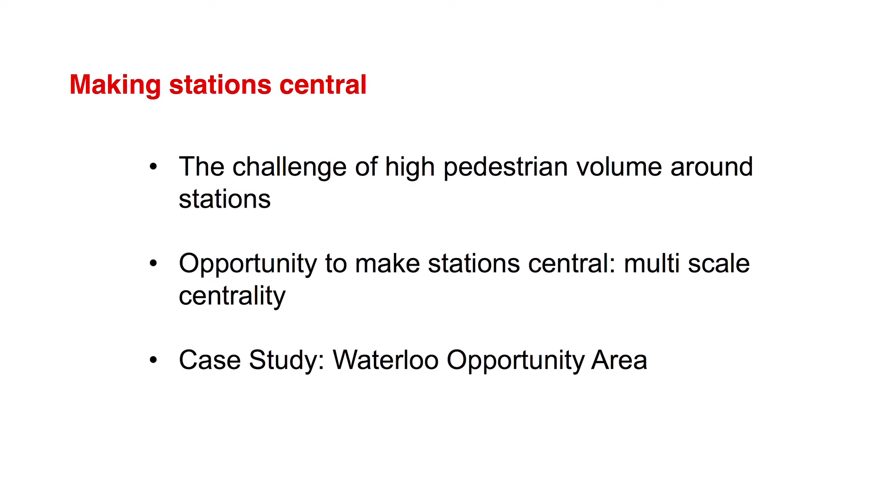And then I'm going to show one case study, which is Waterloo Opportunity Area. It's Elizabeth House, as Camilla was explaining. But again, in that project, as well as looking at the development side, we actually had to go wider to understand what the context was.

You're familiar with London, but what we then do is understand that the city is made of the places that connect to each other. And once you have that understanding, you begin to look at the emerging network. And what you'll see in a lot of the diagrams is this color coding through red for the high movement potential, through the blue spectrum of low movement potential. And this is only looking at the network, at the street connectivity. It has no movement itself embedded into the model, but it actually helps understand and predict movement. So it's a very useful diagnostic tool.

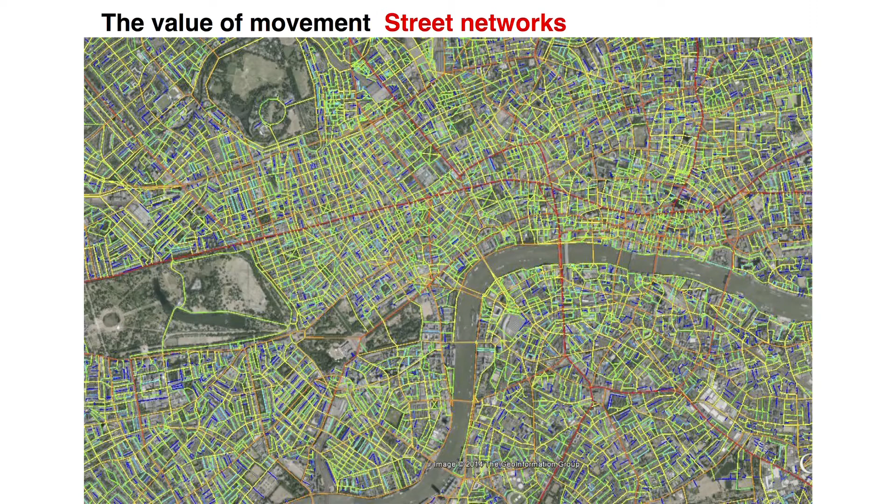What you then do is layer on stations. And as we've heard from Paul just before, the challenge of the stations is, yes, they bring movement, but they bring infrastructure to it. So what we call this thing of stations is negative attractors. You have a lot of movement, but then you have a lot of barriers around the infrastructure that you require for the station. Particularly when you're talking about railway infrastructure, it impedes movement, although you have arches, but simply in terms of the landmass and the boundary required by the station, you're already taking a lot of that movement.

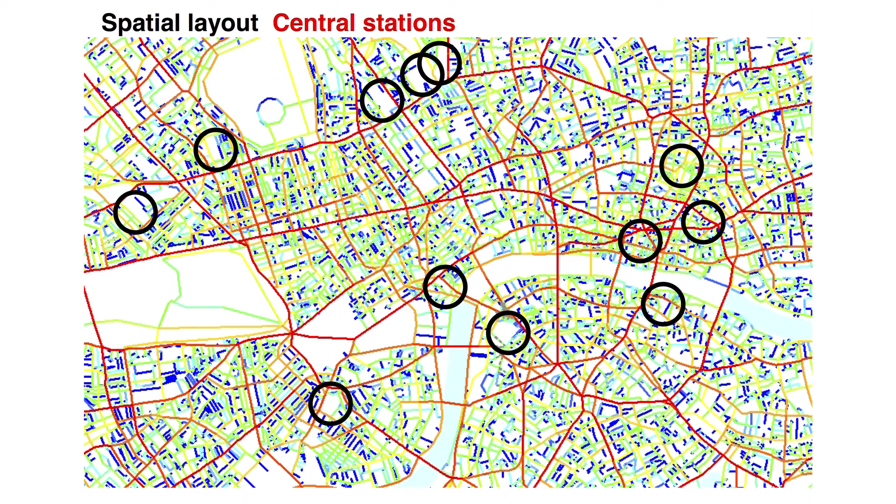The other thing to look at is, unsurprisingly, stations are already quite central. So they're within the key network of spaces in the city. So even though they're not in the center, although the underground then follows that, they're on the main spines leading into London. And again, the same image, taking the background out. And you'll see most of the northern stations along the Marylebone and Euston Road, Victoria Station, Waterloo, which will come in a moment, and then some other stations that come into central locations, Liverpool Street, which I'll talk a little bit more about in a moment.

This is another diagram which looks at the permeability pattern. Again, red are small walkable environments. Blue are big blocks that take you longer to walk around. And what you'll begin seeing is obviously the problem that, while on the one hand you're next to an integrated accessible road, you're creating local segregation. Euston, King's Cross to a varied degree, Marylebone, Paddington, and so on, Waterloo Station. Fenchurch Street is an interesting one because it's well embedded, so there's something to say about almost invisible transport infrastructure.

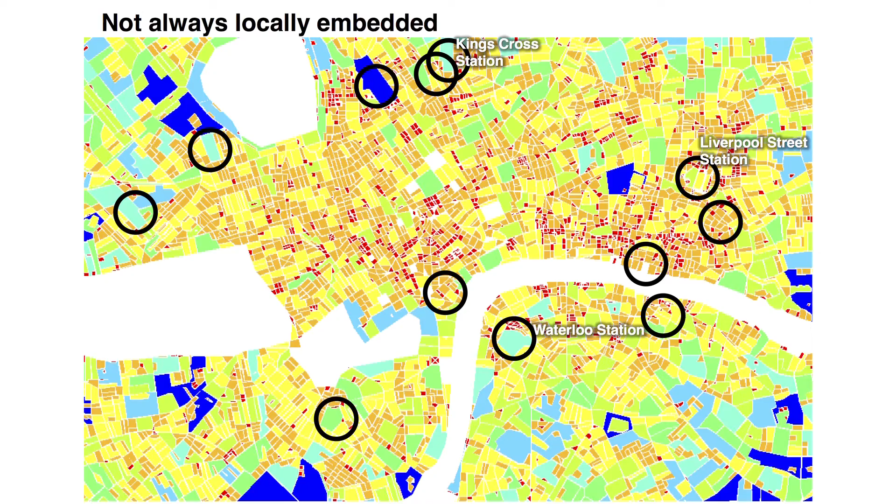And Liverpool Street Station, where the embeddedness allows it to be part of the city. And about 30% of movement that goes through the station is actually through movement. It's not transport-oriented movement. So that's the kind of principle that we're trying to look at when we're integrating transport infrastructure to city infrastructure. It's the grid that allows the potential of that movement to become an opportunity.

Numbers. And this is today, 2012, 100 million passengers coming out of Waterloo Station, and it trails off. And what I've done in this chart is combine the London graph with the top national railway infrastructure. New Street in Birmingham, Glasgow, Leeds, ranking 8 on their own, become 19 when you take the local underground stations. So underground movement in London is higher than New Street to a degree.

So, the first London underground station, Oxford Circus, what else? What is the other underground station? Piccadilly. So, the size of the problem in terms of movement is there, and the opportunities to integrate this, although you could say that they're already integrated. So there's this mismatch, and we then have to look at the local opportunities of the design, as Sandy was telling a moment ago.

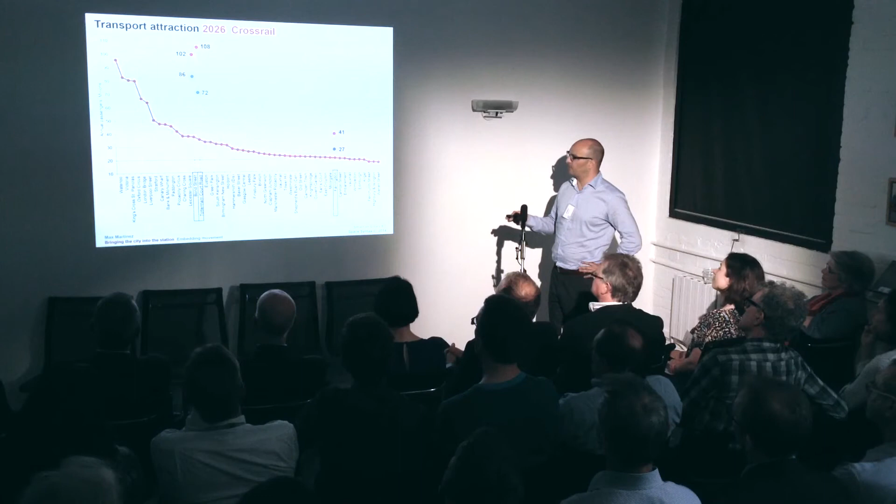The numbers get even higher when you bring in Crossrail. The numbers in blue for 3 stations from Bond Street are 86 million once you bring in Crossrail, 102 million if you then take the revised version that has been circulated by Arup Transport. So again, at the moment we're struggling with the public realm of Waterloo. We then have to handle the same amount of movement through a number of Crossrail stations within central London. How do we do that?

So I'll show Waterloo Station and Elizabeth House. Elizabeth House is this building and site in here, but we're now looking at the whole of the station in terms of the strategic opportunities.

And the process that we go through in the office is first creating a diagnostic, understanding what's there in terms of movement. And I'll go back simply to show the area, as other areas of London, has dramatically changed. The South Bank completely transformed over the last 15 years. Cultural institutions, not least the Tate, and the whole embankment has now come into its own.

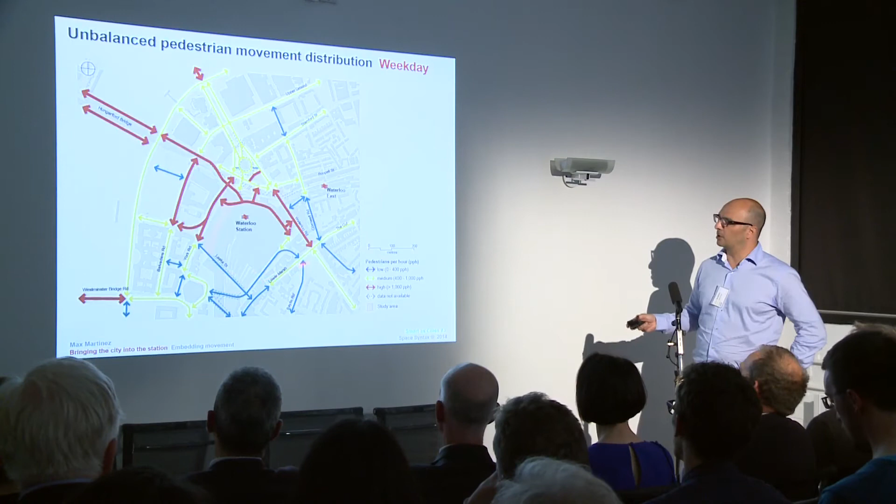And yet, what you have in terms of movement is, again, 100 million passengers per year that immediately disappear from the area. So you have an unbalanced pedestrian distribution during the weekday, although you do have a little bit of movement on the network of commuters leaving Waterloo Station, walking to the city, so quite a lot of distance to go there. But the rest of it struggling. Lower Marsh, as we all are familiar with, again, struggling because it doesn't have the movement potential.

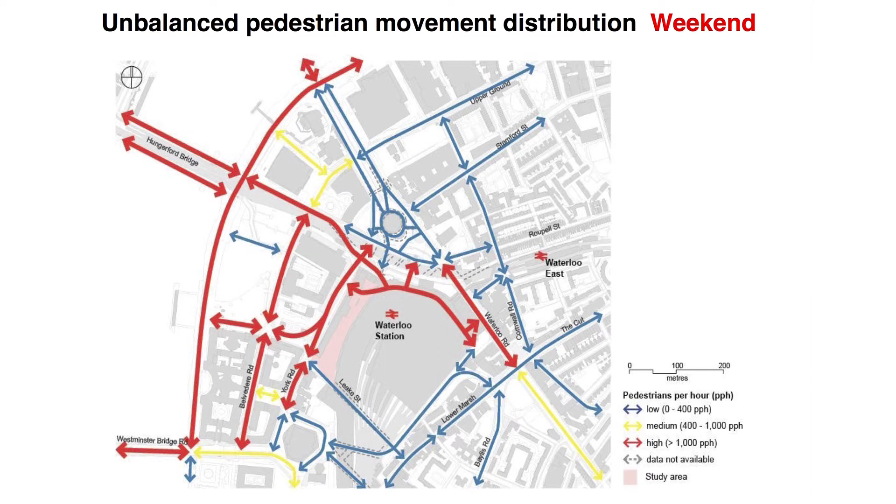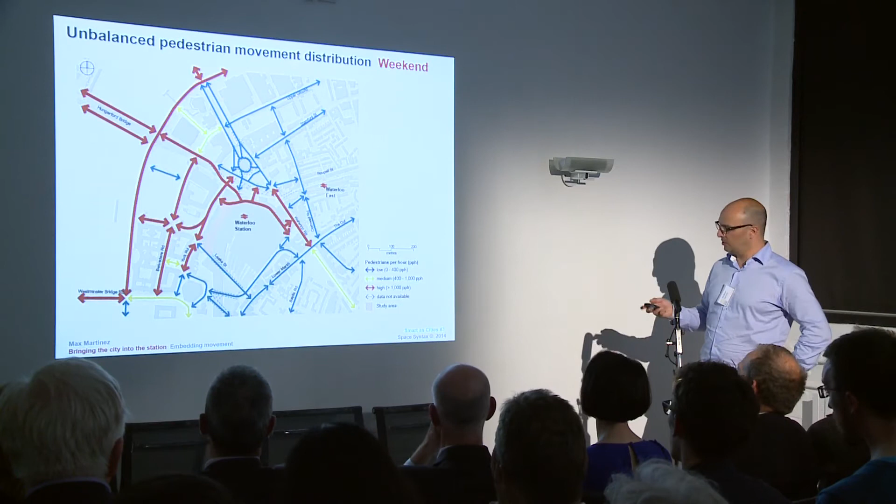The picture is made worse during the weekend, where the Queen's Walk becomes an attractor in its own right, drawing a lot of movement from the station and from the North Bank, and the rest of the network doesn't deliver any movement, and it's not beneficial for anyone. Again, back to Lower Marsh. So that's one thing. The next one is to explain, so why is this happening? And here we go back to the analysis, again, of the network.

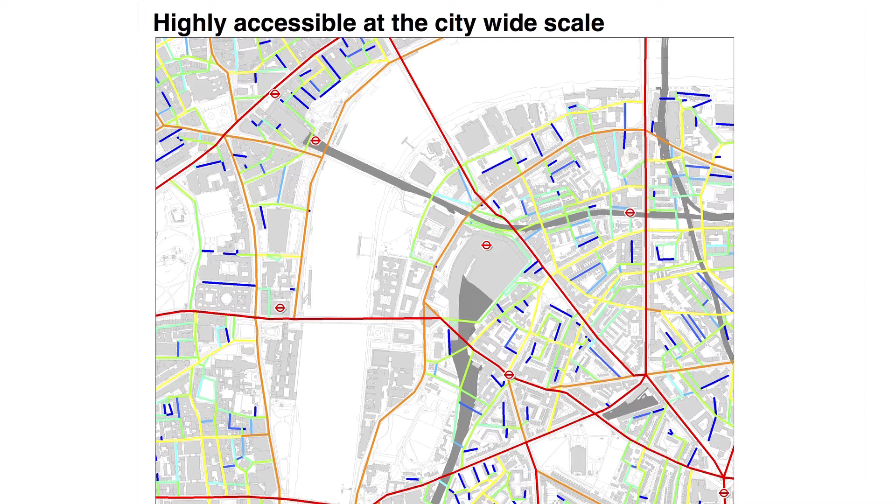It's a strategic location in terms of the city, very easily accessible if you're moving long distances. You have the connectivity. This is vehicular connectivity. You have the connectivity of Waterloo Bridge, Blackfriars, and so on, making it absolutely central. But what you also see is the lack of embeddedness, so that the centrality at a local level is almost non-existent.

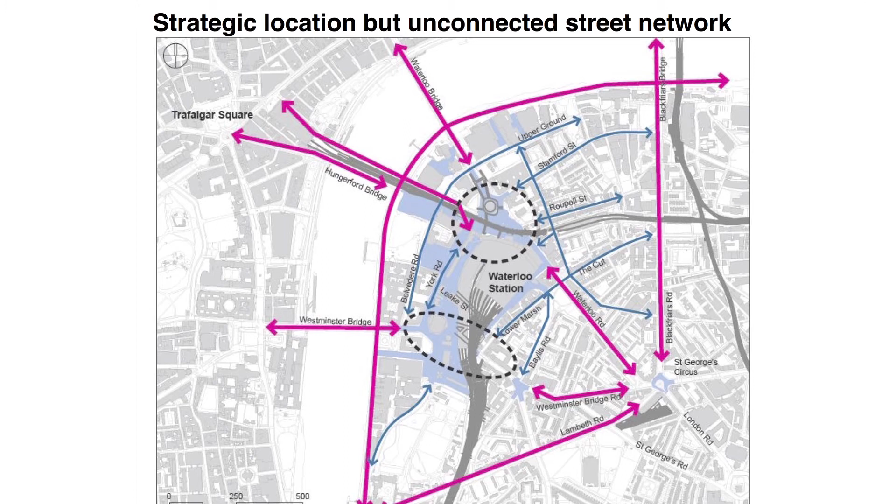A quick diagnostic saying, well, you have the lines moving in, but they somehow fail to compose themselves into the center. You could argue that it's a consequence of planning and the idea of a vehicular-dominated urban plan, as the roundabouts that were supposed to take us around London in the Abercrombie plans. And again, that is on top of the blockage of the station.

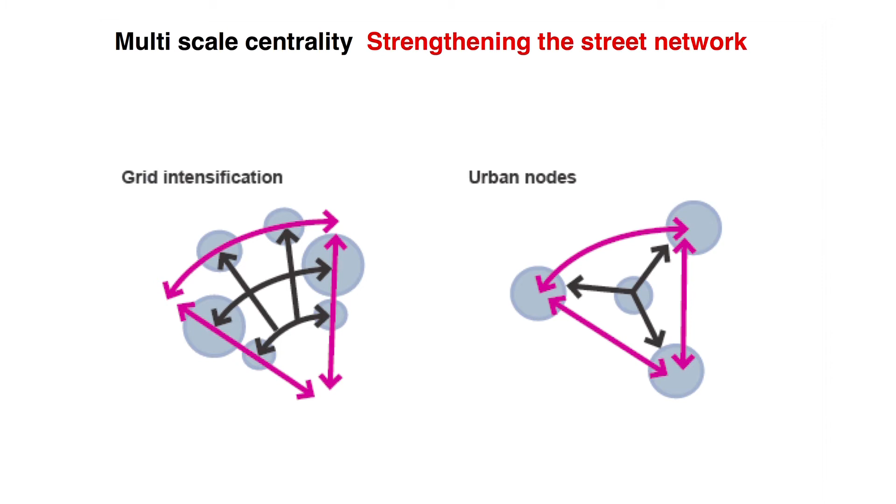A relatively simple strategy, which was simply about intensifying the grid and intensifying the connection of the large-scale centrality with the local centers, the local connections, improving almost the doorstep of the station. And that in itself will allow the emergence of new urban nodes.

The important thing to say here about multi-scale centrality is that it's not a hierarchical thing. It's not that you have a center that behaves at the citywide level and another one that behaves at the local level. There's different segments that behave differently at different scales, if you're walking in a neighborhood center, a residential center, or if you're talking about London as a whole.

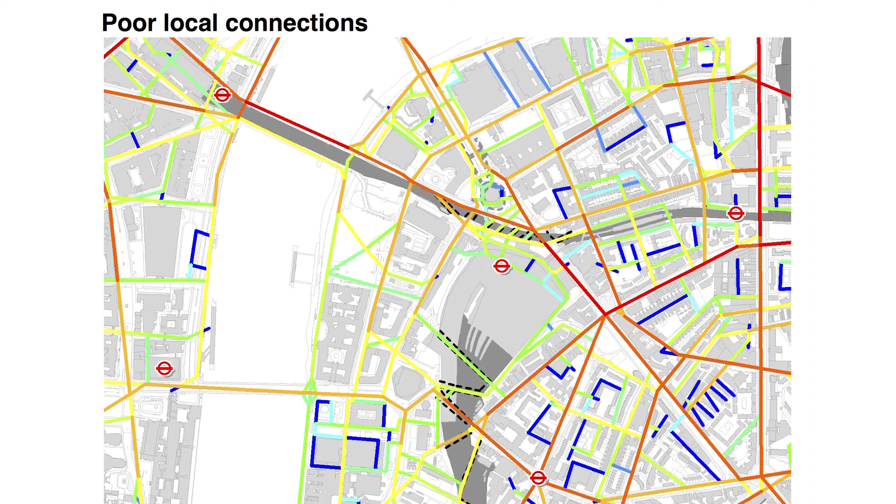Another diagram, and this begins to illustrate the usefulness of having an approach that you can test. And I'm going to flip back and forth, devising a strategy that allows us to bring the station concourse into the city or bring the city into the concourse. And it was simply by unlocking the potential that's already there: the concourse, the Milk Passage, which is through the arches, and the back of Elizabeth House.

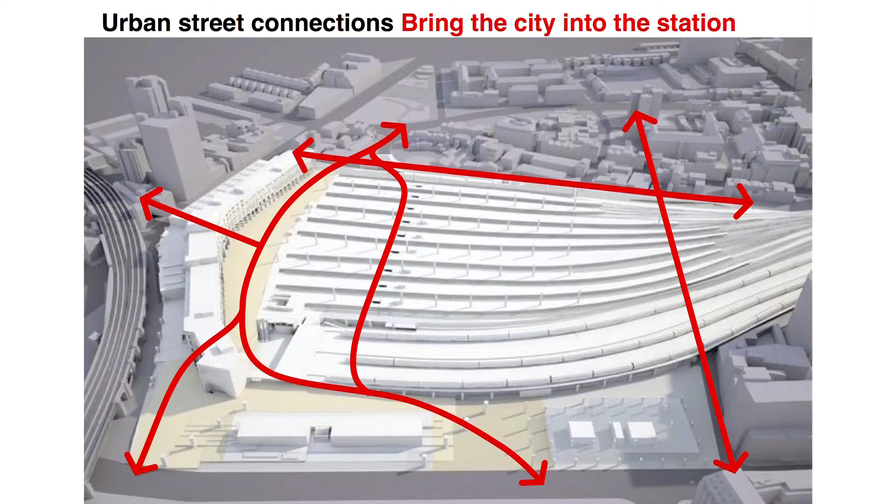Again, simply diagrammatically, this is always, as has been explained before, a multi-headed solution team, and we were working with the client, which was Chelsfield, with David Chipperfield and with Hopkins in developing the specificity of the deliverable. But you can simply say, at a very diagrammatic level, the connectivity that needs to be there only needed to be unlocked.

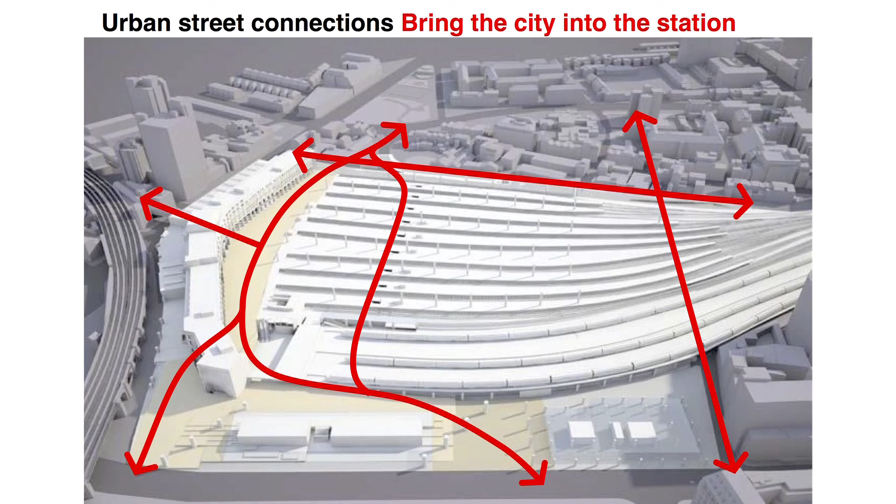And again, a similar image to what Camilla did, which was about, while we're taking the city into the station, you need to also work in the public realm, something that has been well said before. And a lot of it has to do with transforming potential conflicts into solutions. We did a set of studies understanding the massive amount of people that came out through the station, cyclists leaving Waterloo Station, and then high levels of bus movement as well as taxis.

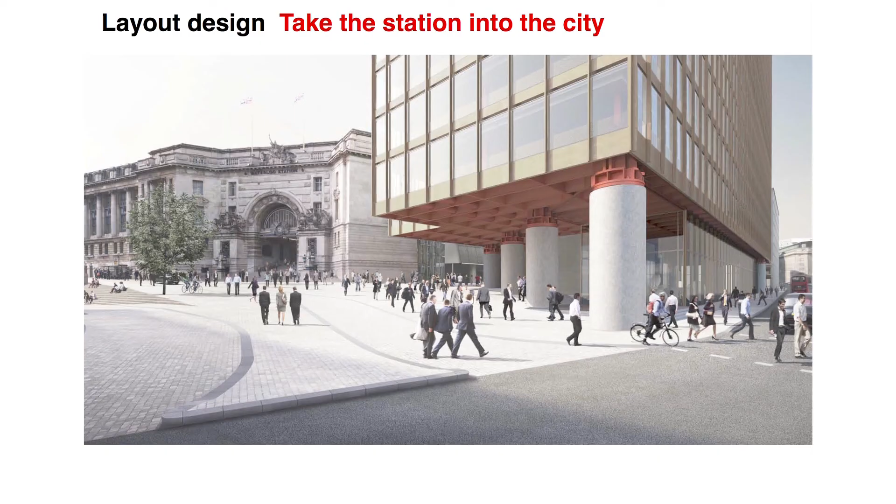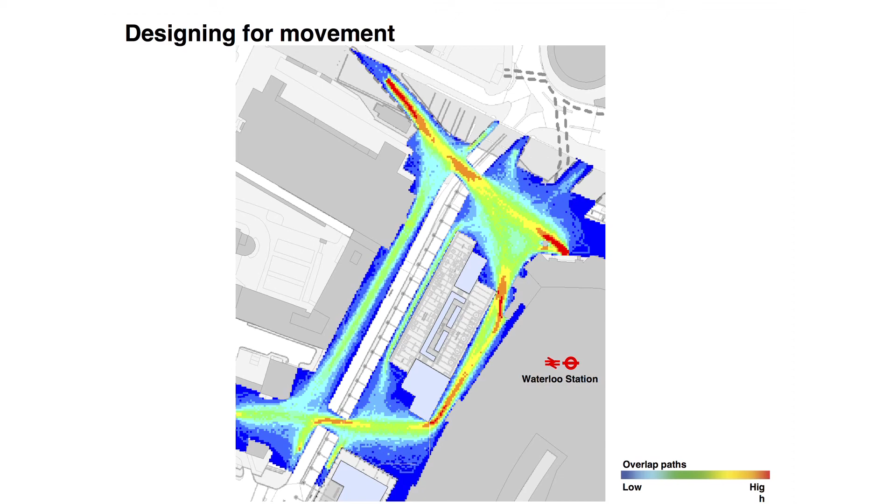So in a sense, the argument was that you can have a space that gets rid of the infrastructure that separates pedestrians and vehicles, provided you then take into account pedestrian desire lines. And we do that, again, by a lot of testing and what we like to think of as designing for movement. So you create the structure of the layout, you then put land use along it, but then you have to design the two together. And again, a heat map informing where the movement will be. And this was done at the technical level for the transport assessment in the EIA as well.

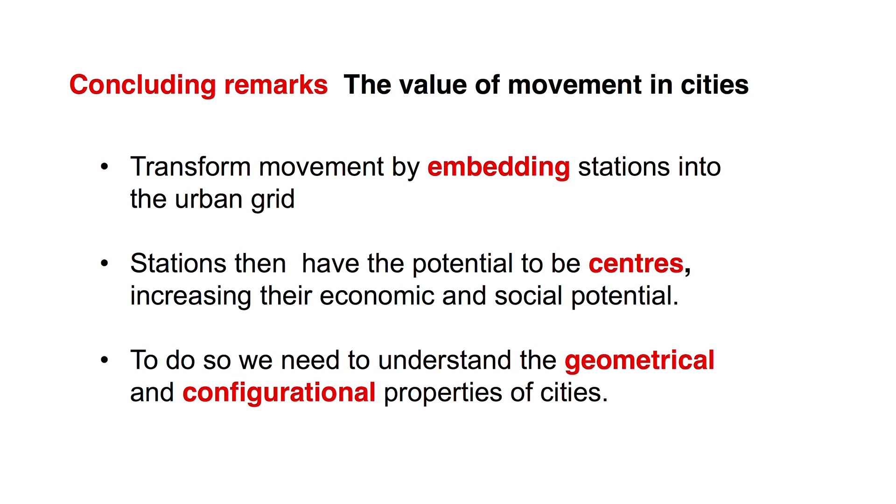To finish up, I think this will now be familiar to everyone. It's about embedding the stations into the urban grid. The idea that if we do that, stations can become centers, but they don't become centers simply because they're stations. And in order to do that and to understand how they can become embedded, we need to understand the city in its geometrical and configurational properties.